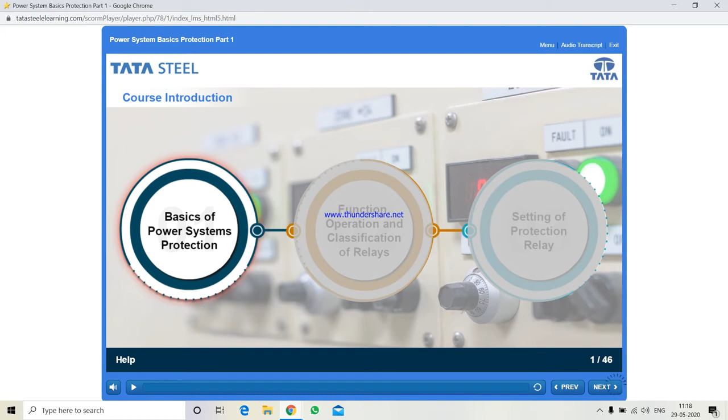Let us take a look at the objectives of this course. By the end of this course, you will be able to define power system protection, explain the significance of power system protection, define protection relay, define the nature of faults, explain the causes and consequences of faults, explain a few abnormal conditions arising from different types of faults, explain the essential qualities of protection, explain the basic principles of protection, list and discuss each component of protection. Click Next to get started with the first topic.

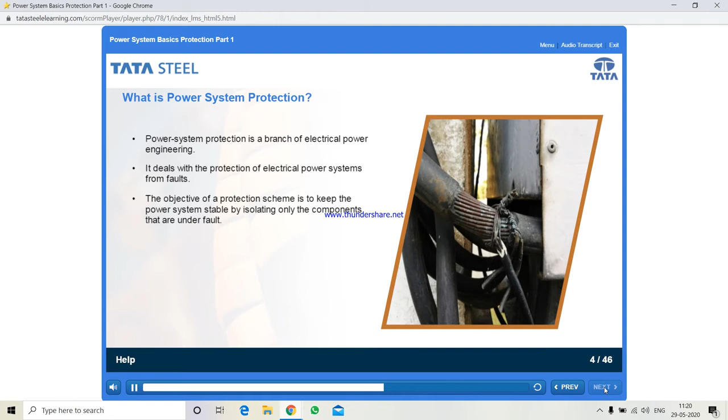Let us begin with understanding what exactly power system protection means. Power system protection is a branch of electrical power engineering that deals with the protection of electrical power systems from faults through the isolation of faulted parts from the rest of the electrical network. The objective of a protection scheme is to keep the power system stable by isolating only the components that are under fault, whilst leaving as much of the network as possible still in operation. Those protection schemes must apply a very pragmatic and pessimistic approach to clearing system faults. The devices that are used to protect the power systems from faults are called protection devices.

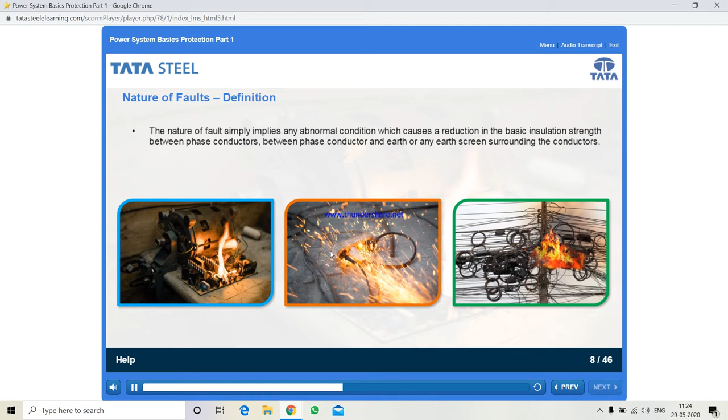We discussed that a protection relay detects abnormal conditions like faults. So what exactly does that mean? What is the nature of faults? Let's find out. The nature of faults simply implies any abnormal condition which causes a reduction in the basic insulation strength between phase conductors, between phase conductor and earth, or any earth screen surrounding the conductors.

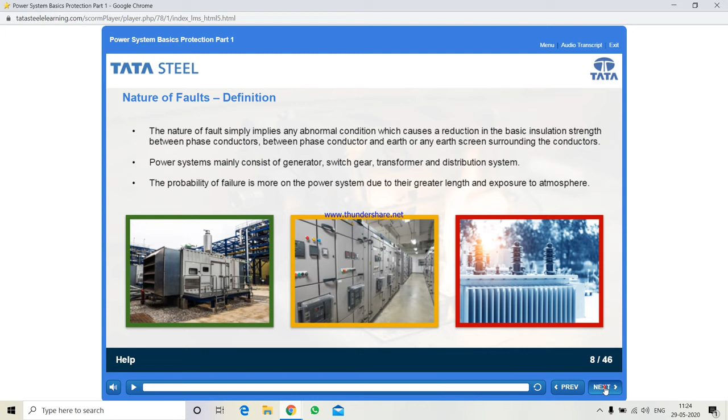Power systems mainly consist of generator, switchgear, transformer and distribution system. The probability of failure is more on the power system due to their greater length and exposure to atmosphere. Why do faults occur? Breakdown could be due to normal voltage or abnormal voltage as well. Click on each tab to learn more.

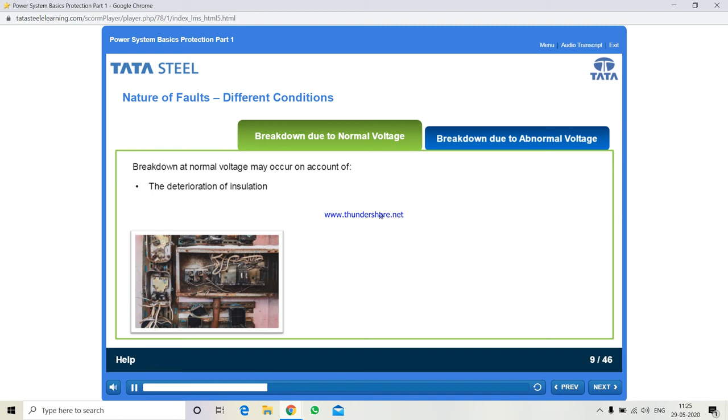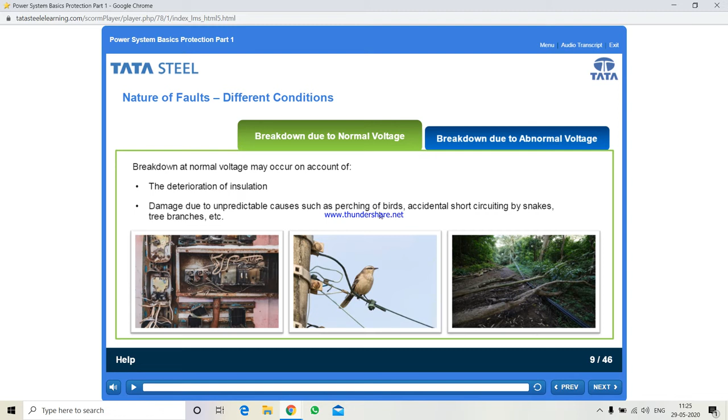Breakdown at normal voltage may occur on account of the deterioration of insulation, damage due to unpredictable causes such as perching of birds, accidental short-circuiting by snakes, tree branches, etc. Breakdown may occur because of abnormal voltages caused by switching surges, surges caused by lightning.

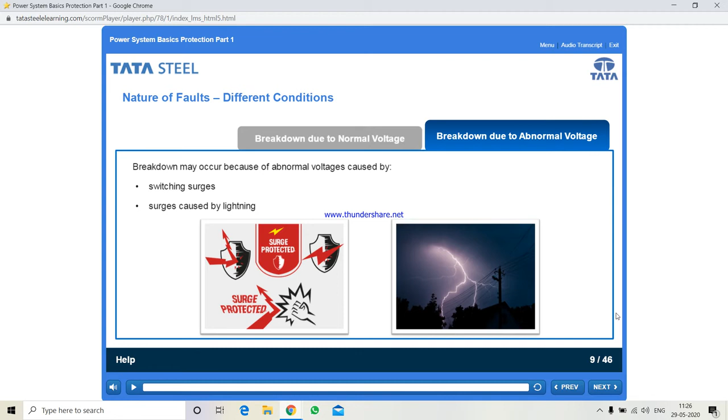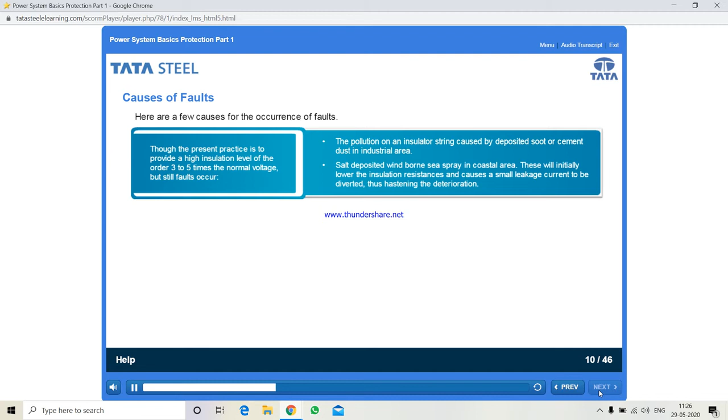Let us now understand why faults occur. Here are a few causes for the occurrence of faults. Though the present practice is to provide a high insulation level of the order 3 to 5 times the normal voltage, still faults occur. The pollution on an insulator string caused by deposited soot or cement dust in industrial areas, salt deposited wind borne sea spray in coastal areas. These will initially lower the insulation resistance and cause a small leakage current to be diverted, thus hastening the deterioration.

Secondly, even if the insulation is enclosed, such as sheathed and armored, the deterioration of the insulation occurs because of aging effect, void formation in the insulation compound of underground cable due to unequal expansion and contractions caused by the rise and fall of temperature.

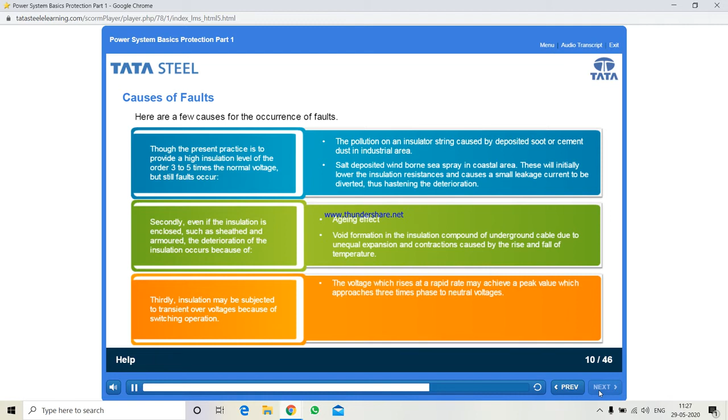Thirdly, insulation may be subjected to transient overvoltages because of switching operation. The voltage which rises at a rapid rate may achieve a peak value which approaches 3 times phase to neutral voltage. Lightning produces very high voltage surges in the power system in the order of million volts. These surges travel with the velocity of light in the power circuit. The limiting factors are the surge impedance and the line resistance.

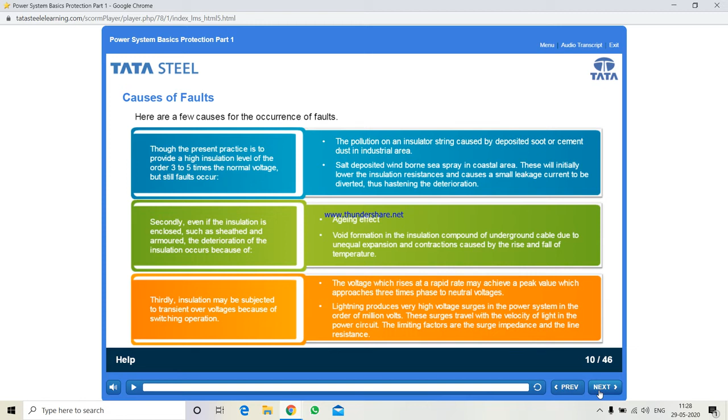We have learned about the causes of faults. Let us now look at the consequences when these faults occur. A serious result of an uncleared fault is fire, which may not only destroy the equipment of its origin, but also may spread in the system and cause total failure. It could lead to a great reduction in voltages. It could cause damage to the elements of the system by the electrical arc.

There could be damage to the other parts due to overheating. It could disturb the stability of the electrical system, and this may even lead to a complete shutdown of the power system. Voltage reduction may fail the pressure coil of the relay. There could be considerable reduction in the voltage on healthy feeders connected to the system having the fault.

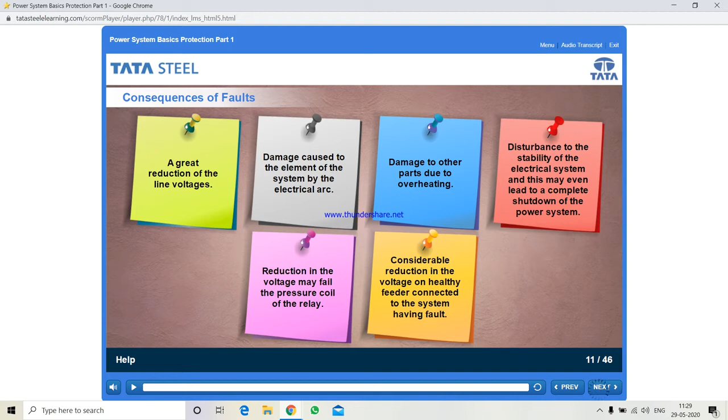Do you think that faults are always caused by current? No. Faults are divided into three verticals based on their type. They are current, voltage, and frequency. Take a look at this table to know the specifics in each vertical. We will understand a few of these in detail in the next screen.

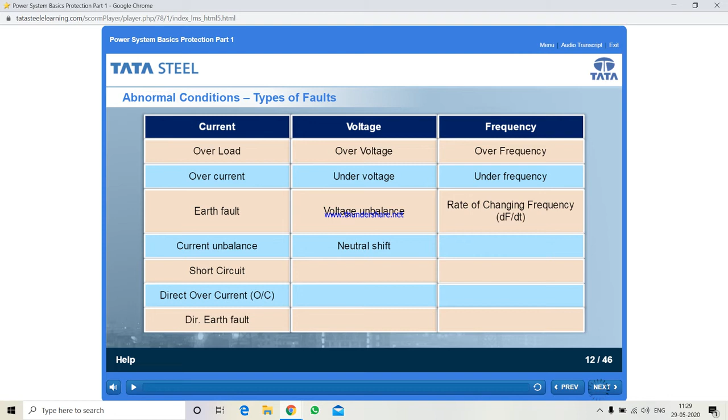Under the current vertical, we have seen two types of faults, overload and overcurrent. These seem to be the same fault, but they are different. Let us now first understand overload with the help of an animation of a conveyor belt and driving motor. Here is a conveyor belt carrying some material. It is driven by a 100 kilowatt, 415 volts, 50 hertz, three-phase induction type motor. An ammeter connected with the electrical power circuit is showing the load current. The ammeter shows the current at normal running conditions, and its average reading shows around 120 ampere.

Once the ammeter shows 150 ampere instead of 120 ampere, someone observing this reading should doubt that there is some problem. This problem is known as overload, which means that there is some abnormality in the conveyor system. However, this will not damage the motor as it is less than the full load current of the motor. So, if we want to protect this type of abnormality of the system, we should provide overload protection with current set point, and the set point reference is the normal running current, that is 120 ampere in this case.

Now, let us look at overcurrent. In this scenario, if the ammeter shows more than 200 ampere, then it is more than the full load current of the motor. This abnormality is known as overcurrent, and it is very harmful for the motor. The motor may be damaged if it runs with this amount of current. So, the overcurrent protection is provided with proper current set point based on the motor full load current, that is 200 ampere in this case.

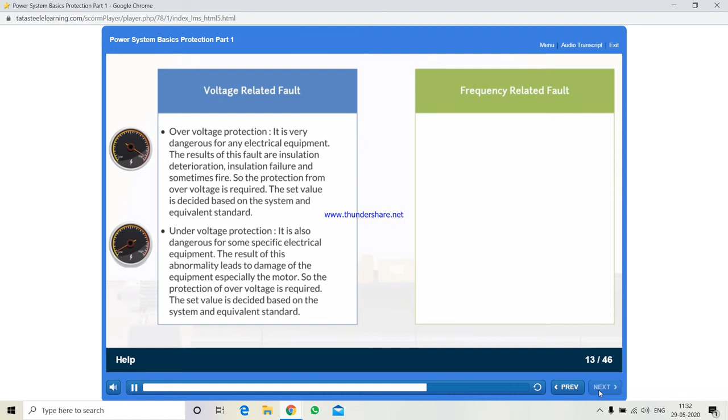Under-voltage protection: it is also dangerous for some specific electrical equipment. The result of this abnormality leads to damage of the equipment, especially the motor. Therefore, under-voltage protection is required. The set value is decided based on the system and equivalent standard.

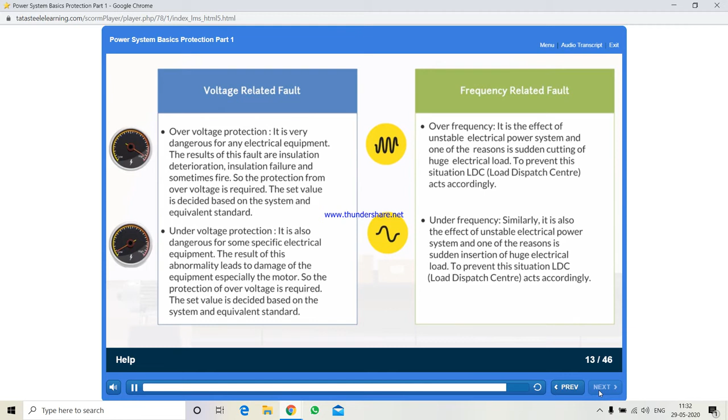Frequency-related fault, over-frequency. It is the effect of unstable electrical power system, and one of the reasons is sudden cutting of huge electrical load. To prevent this situation, LDC, Load Dispatch Center, acts accordingly. Under-frequency. Similarly, it is also the effect of unstable electrical power system, and one of the reasons is sudden insertion of huge electrical load. To prevent this situation, LDC, Load Dispatch Center, acts accordingly. Now take a look at the fault statistics table to know about the percentage of faults in different types of equipment.

Let us now take a look at the essential qualities when deciding on selecting protection. Click on each tab to learn more. Speed is an essential quality for protection. Protective relaying should disconnect a faulty element as quickly as possible. Having a speedy protection system improves power system stability, decreases the amount of damage incurred, decreases the outage time for power consumers, and decreases the possibility of severe fault in the upstream.

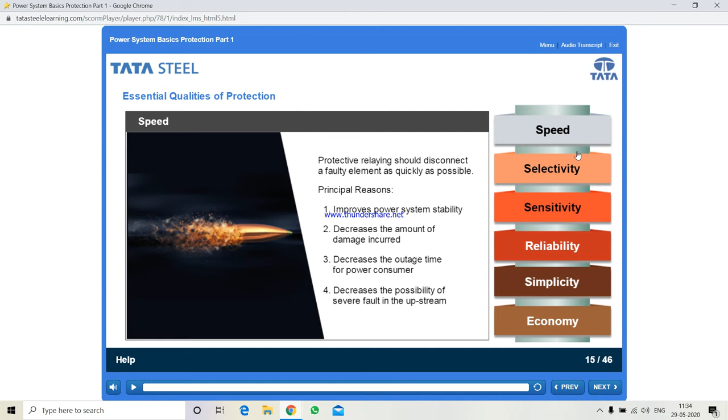Selectivity is the ability of the protective system to determine the point at which the fault occurs by selecting the proper type of protective relay. This gives swift command to the nearest circuit breakers for clearing the fault with minimum or no damage to the system. Sensitivity of a protective scheme refers to the smallest value of actuating quantity at which the protection starts operating in relation to the minimum value of fault current in the protection zone.

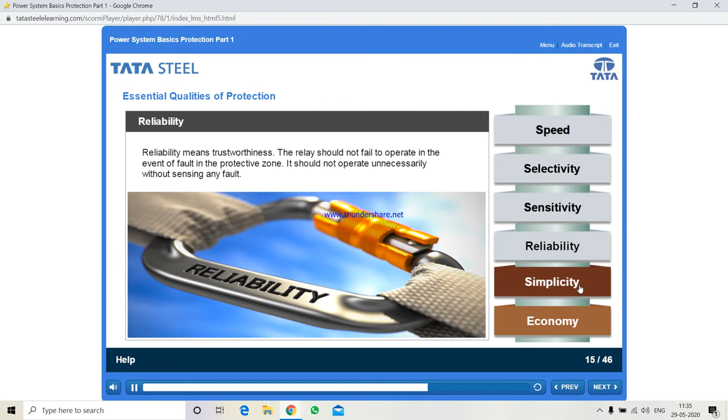Reliability means trustworthiness. The relay should not fail to operate in the event of fault in the protective zone. It should not operate unnecessarily without sensing any fault. Construction of the relay should be simple, good in quality, correct in design for installation, and less maintenance or supervision prone. As with all good engineering designs, economics plays a major role. It is required to achieve all important general requirements together at minimum compromising cost. Too much protection is as bad as too little. So, the relay engineer must strike a sensible compromise with due regard to the practical situation considered.

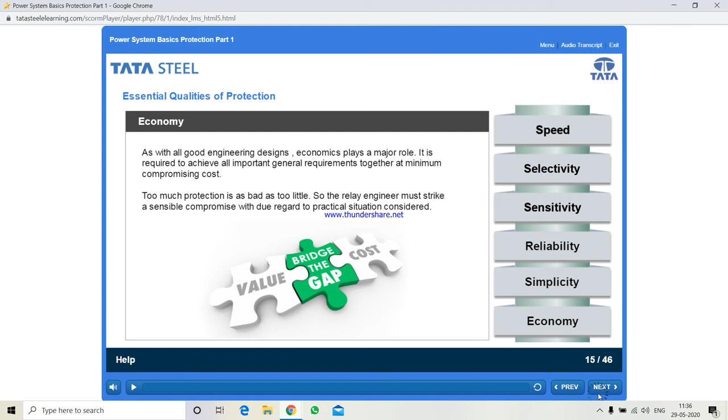We have learned about the essential qualities of protection. Now let us take a look at the basic principles of protection. Essentially, the system or the equipment should be able to discriminate the appropriate disconnecting device. There are two methods of discriminating faults: those which discriminate as per the location of the fault and the type of the fault. Further, there are different ways of discriminating the types of faults.

They are discrimination by time, discrimination by current magnitude, discrimination by time and direction, discrimination by distance measurement, time as an addition to current magnitude or distance discrimination, current balance discrimination, power direction comparison discrimination, and phase comparison discrimination. So these are the basic principles of protection. We have covered quite a few topics. Time now for a quick review.

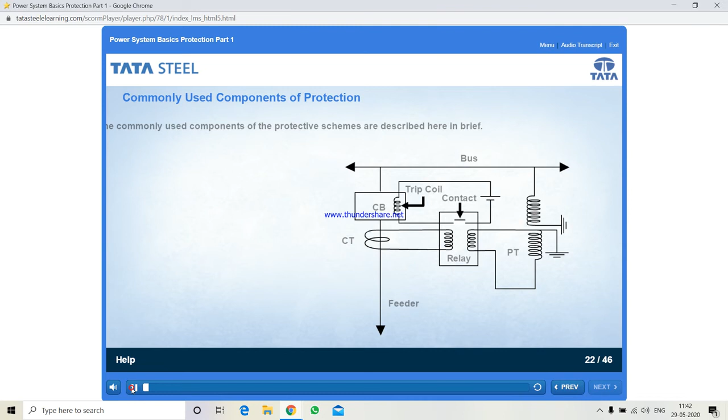Some of the commonly used components of the protective scheme are described here in brief.

They are current transformer (CT), voltage transformers, circuit breaker (CB), tripping and auxiliary supplies, relays. We shall discuss each of these components further in detail.

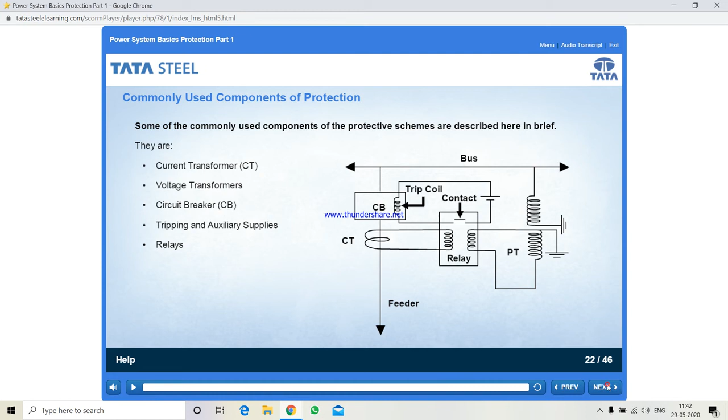We have learned about the components of protection. Before going into the details of relay, we should understand the basics of sensing element. Let us start with understanding about what the current transformer CT does.

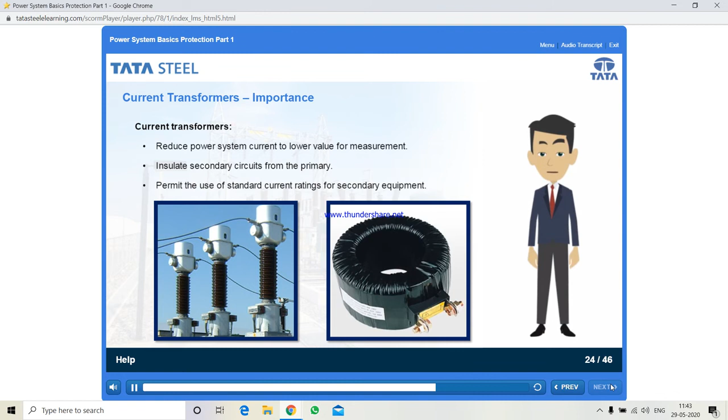Current transformers reduce power system current to lower value for measurement, insulate secondary circuits from the primary, and permit the use of standard current ratings for secondary equipment. Next, we will look at the types of current transformers. Remember, the relay performance depends on the CT, which drives it.

There are two types of CTs as per construction: bar type and wound type. In the bar type CT, a magnetic core and one winding can be found, which is known as secondary winding. On the other hand, in wound type CT, a magnetic core and two windings are present.

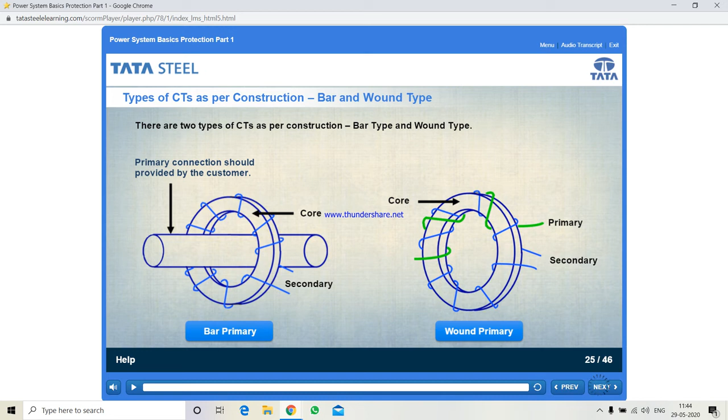Further, in this process, current is produced in the secondary winding denoted by S2 and S1. It is noteworthy that the current produced here flows in the opposite direction in the same plane. It is denoted by IS. Note that in the other way, the current flows in secondary connection from S1 to S2 externally if the secondary connection is parallel. Let us move to the next screen.

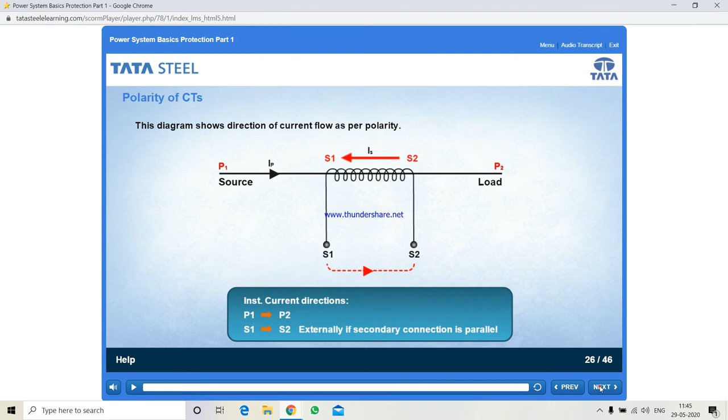As mentioned earlier, polarity plays a vital role for some applications like differential protection, directional overcurrent protection, etc. Sometimes it becomes difficult to identify the polarity of current transformer due to wear and tear or labels going missing, etc. So in such instances, how do we determine the polarity of CT? Well, that is when we use flick test to identify polarity. Let us see how it is done.

For this test, a battery of 6 to 9 volts is taken and its positive terminal is connected to any one terminal of CT primary through a push button. This point is named as P1 and negative side is named P2. So when the push button is on, the direction of current flow is from P1 to P2. To determine the secondary connection, a DC microammeter is fixed.

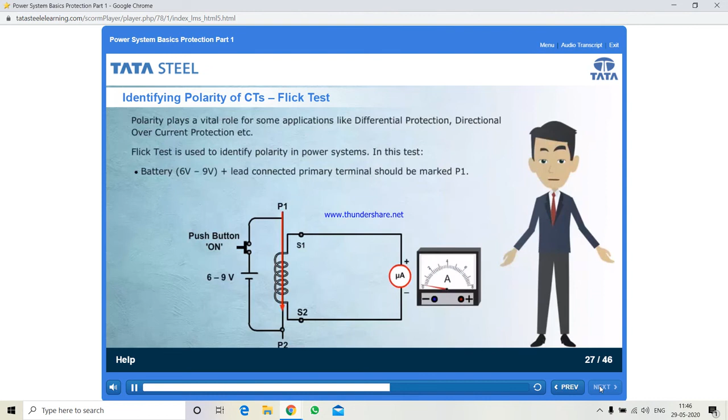If the needle of the ammeter flicks in the clockwise direction, the current flow will be from S1 to S2. Then the positive lead of the DC microammeter is connected to S1. If the needle flicks anti-clockwise, then the flow is supposed to be in the reverse direction. Then S1 becomes S2 and vice versa. This is how a flick test is carried out to identify polarity.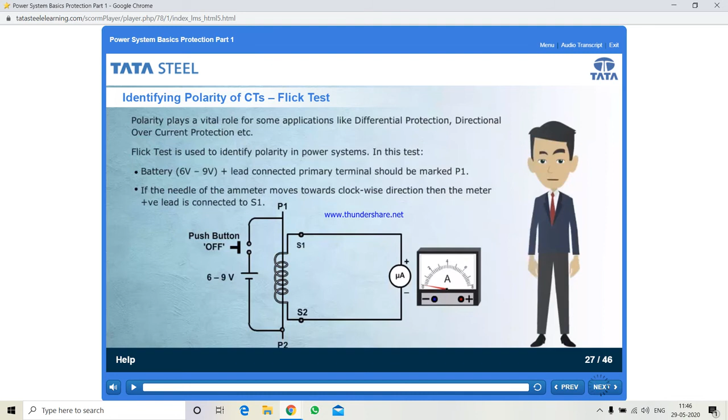CT polarity plays a vital role here to sense the direction of current with reference of voltage transformer. The directional protection will not work if CT connection is changed or is wrongly connected. So what exactly does directional protection mean? It means the relay will become operational in one direction of current, but it will not sense any fault in opposite direction of current. Let us understand with the help of these diagrams here.

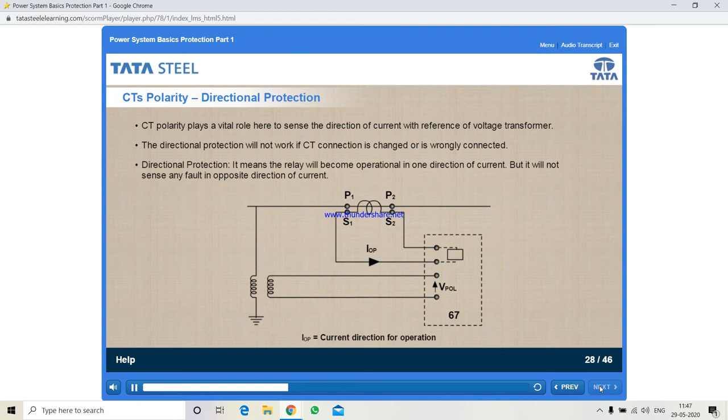This diagram shows a normal scenario of current flow. The primary and secondary connections are all in place. Here, IOP refers to the current direction for operation. Now suppose there is a fault. In this case, the relay will sense the fault as the current is passing in forward direction and trip the circuit breaker when the current exceeds the set value.

This is directional protection. However, let us look at another scenario where the connections of the CT secondary are interchanged. Here, the relay will not sense the fault as the CT secondary current is passing in reverse direction and will not trip the circuit breaker. In this case, the relay will act in opposite manner, which will not fulfill the expected operational protection requirement.

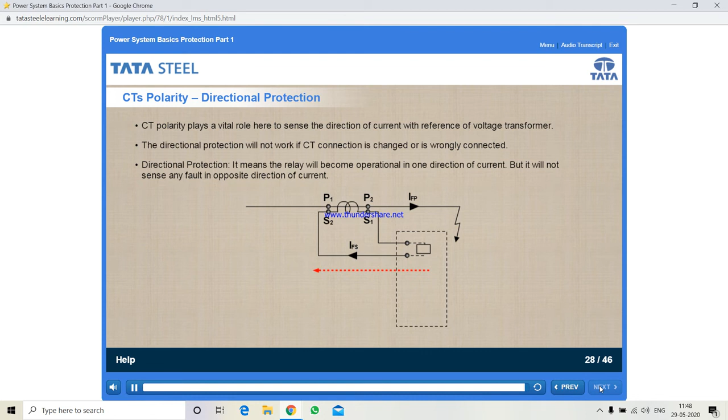Let us now understand what knee point voltage means. The voltage at which a 10% increase in applied voltage increases the magnetizing current by 50% is referred to as knee point voltage. Mostly, the operation point of the CT is limited to the linear region and is not allowed to reach the saturation region. Beyond knee point voltage, the CT gets saturated and it may be damaged if the CT remains in this region for a long time. Let's move to the next screen.

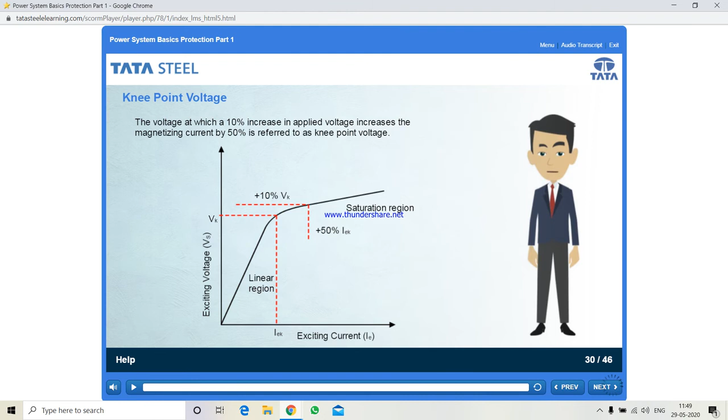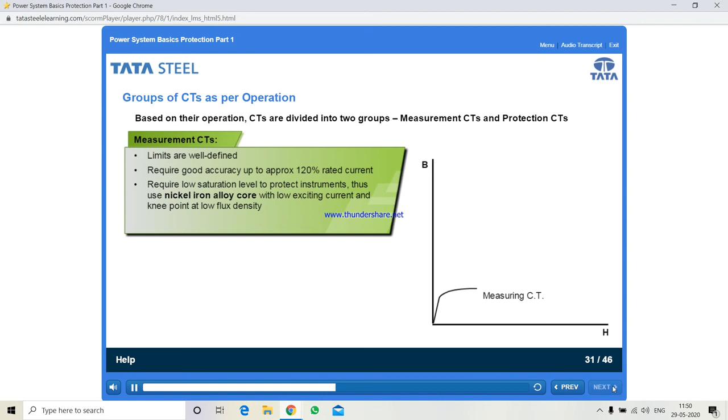We have learned about groups of CTs as per construction. Similarly, based on their operation, CTs are divided into two groups: measurement CTs and protection CTs. Both have different characteristics. Let's look at them in detail. Measuring CTs. Limits are well defined. Require good accuracy up to approx 120% rated current. Require low saturation level to protect instruments. Thus use nickel iron alloy core with low exciting current and knee point at low flux density. Measuring CT is more accurate than protection CT.

Protection CTs operate over a wide range of currents. Accuracy not as important as above. Require accuracy up to many times rated current. Thus, use grain-oriented silicon steel with high saturation flux density. The saturation point denoted by VK is more than measuring CT. Now we'll learn about the specifications of CTs.

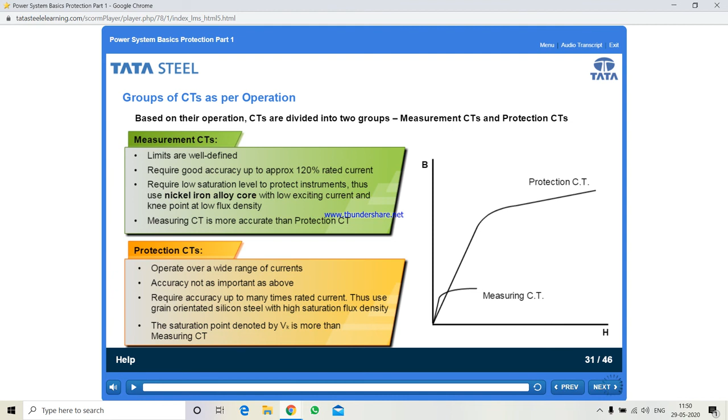As for all equipment, CTs also follow a naming convention. It goes something like this: 30, 5P, 10. Now what does that mean? Well, 30 is the rated VA or burden, 5P is the class, and 10 is the accuracy limit factor or ALF. Click on each tab to learn more.

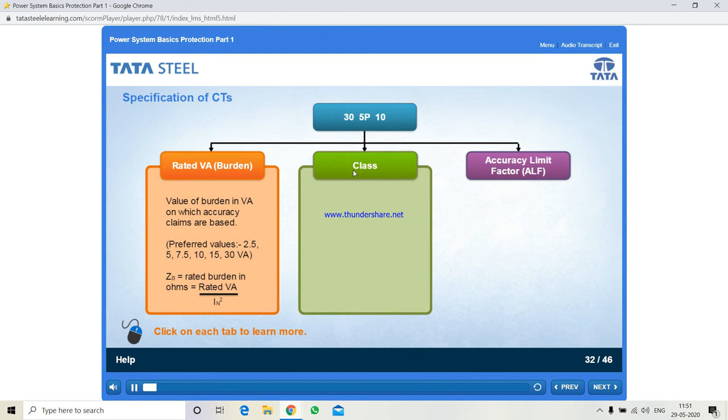Value of burden in VA on which accuracy claims are based. Preferred values 2.5, 5, 7.5, 10, 15, 30 VA. ZB is equal to rated burden in ohms, is equal to rated VA by IN squared.

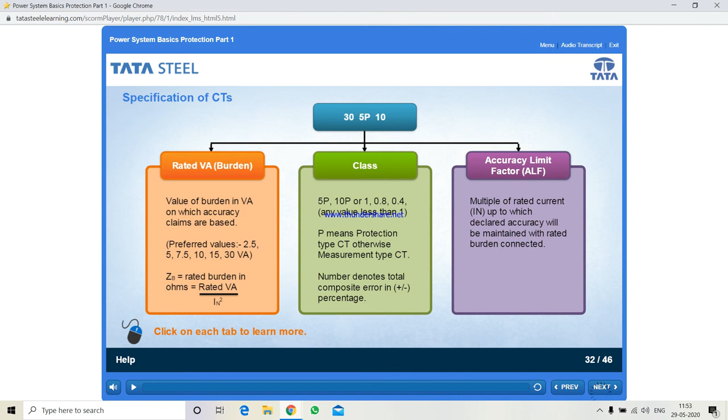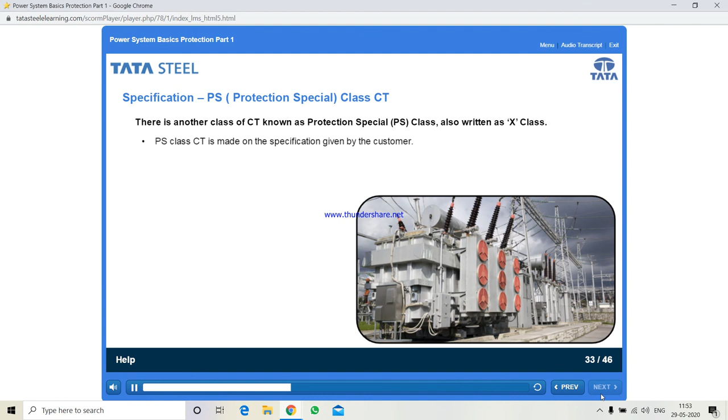In the previous screen, we have learned about the protection type CT class and measurement type CT class. Apart from these two, there is another class known as the protection special PS class. This is also written as X class. PS class CT is made on the specification given by the customer. The cost of the CT is higher than the normal CT. This type CT is used in special operations such as differential protection.

It is specified in terms of rated primary current, turns ratio maximum error equal to 0.25%, knee point voltage, mag current at specified voltage, and secondary resistance at 75 degrees Celsius.

Voltage transformers are the next important component of protection. Voltage transformers are used for measuring and protection. May be single phase or three phase. Provide isolation from high voltages. Must operate in the linear region to prevent accuracy problems. Must be capable of driving the burden specified by relay manufacturer.

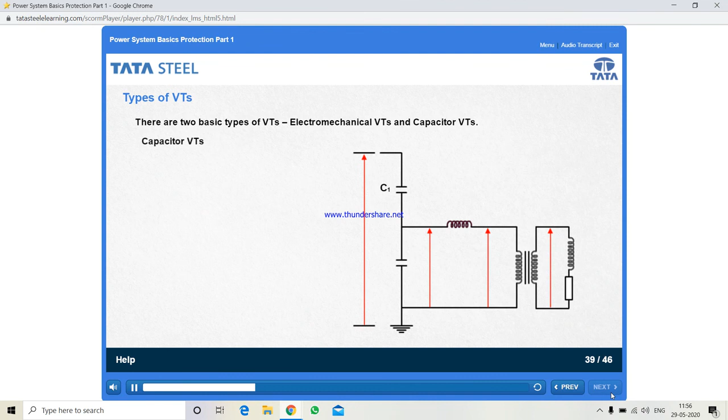There are two basic types of VTs, electromechanical VTs and capacitor VTs. Electromechanical VTs are similar to a power transformer, may not be economical above 132 kV, robust and more reliable. Capacitor VTs, CVT, used at high voltages 132 kV or above. Main difference is that CVT has a capacitor divider on the front end. Require maintenance as capacitor is used.

This image here shows a capacitor voltage transformer. As you can see, there are two capacitors C1 and C2 being used to bring down the voltage across C2. Though electromechanical VT is robust, it is not used for high voltages like 132 kV or above due to its high cost and large size. Therefore, the CVT is required to manage high voltage instances.

The next component of protection is circuit breaker. A circuit breaker is a switching device that interrupts the abnormal or fault current. It is a mechanical device that disturbs the flow of high magnitude or fault current and in addition performs the function of a switch. The circuit breaker is mainly designed for closing or opening of an electrical circuit, thus protects the electrical system from damage.

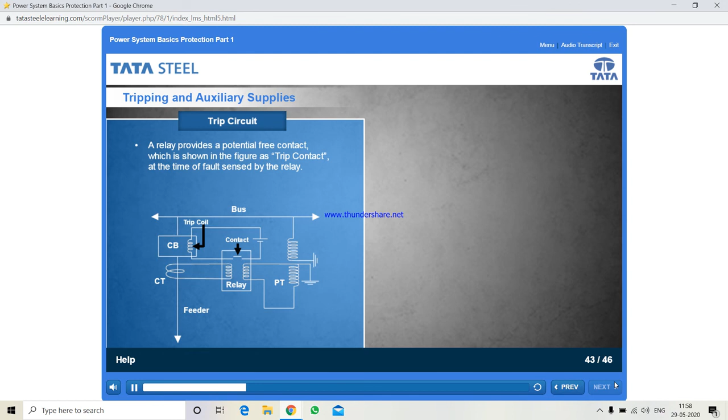Let us now look at the fourth component of protection, tripping and auxiliary supplies. So, what is a trip circuit? A relay provides a potential free contact, which is shown in the figure as trip contact at the time of fault sensed by the relay. The auxiliary supply goes through this contact to the trip coil of the circuit breaker.

So, what is auxiliary supply? All the circuit breakers are DC, direct current operated. Because DC power can be stored in battery, and at the time of total failure of incoming power, still the circuit breakers can be operated for restoring the situation by this battery. Hence, the battery is another essential item of the power system. This is auxiliary supply.

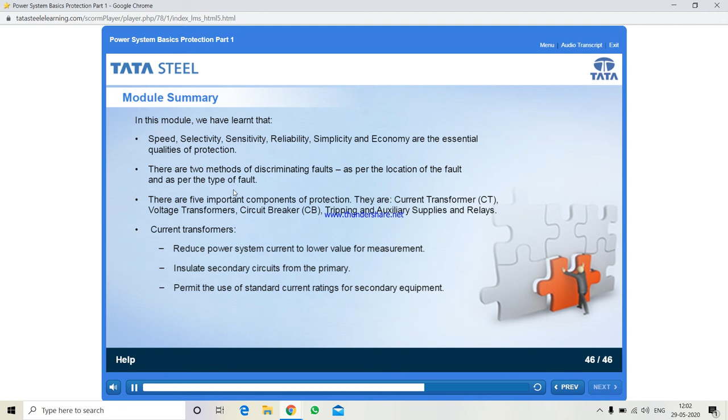They are current transformer, CT, voltage transformers, circuit breaker, tripping and auxiliary supplies and relays. Current transformers reduce power system current to lower value for measurement. Insulate secondary circuits from the primary. Permit the use of standard current ratings for secondary equipment. There are two types of CTs as per construction: bar type and wound type. Polarity of CTs plays a vital role. Flick test is used to identify polarity of current transformers. Based on their operation, CTs are divided into protection CTs and measurement CTs. There are two basic types of VTs: electromechanical VTs and capacitor VTs. A circuit breaker is a switching device that interrupts the abnormal fault current.